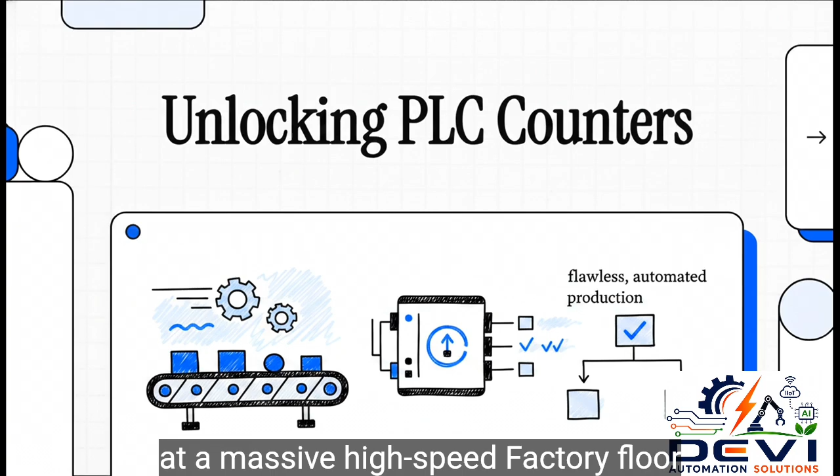I am absolutely thrilled you're joining us today because we're going to explore what is essentially the deterministic heartbeat of modern manufacturing. If you've ever looked at a massive, high-speed factory floor and wondered how they keep track of everything without the whole operation falling apart, you're in the right place. Today, we're taking a deep dive into the technology that powers flawless automated production. We're talking about the PLC counter.

So think about this for a second. How does a factory count 10,000 bottles a minute without making a single mistake? Honestly, imagine trying to do that manually. By the time you've even blinked, a dozen products have already zipped past you on the conveyor belt. The sheer scale and speed of high-speed industrial production is mind-boggling. Human error isn't just a possibility in this kind of scenario, it's practically guaranteed. Yet somehow, these massive automated facilities run 24/7 with absolute, unwavering precision. How do they pull it off?

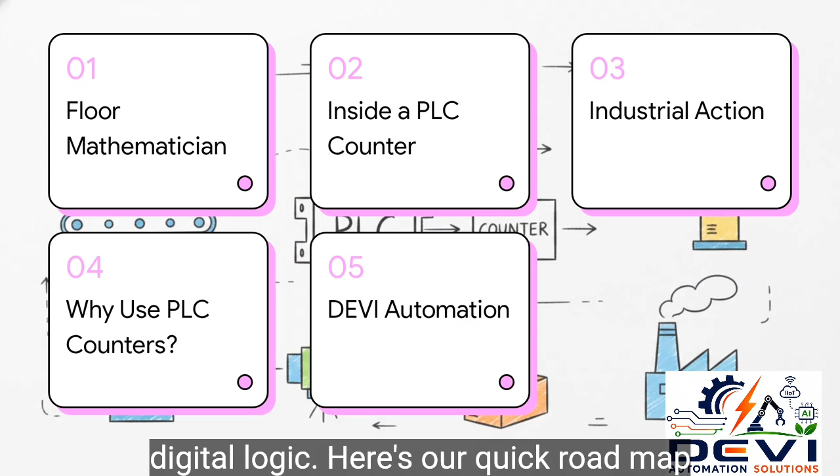Well, the secret lies in a tiny, incredibly powerful piece of digital logic. Here's our quick roadmap for today. Number 1, the factory floor mathematician. Number 2, inside a PLC counter. 3, real-world industrial action. 4, why use PLC counters? And finally, number 5, DEVI Automation Solutions.

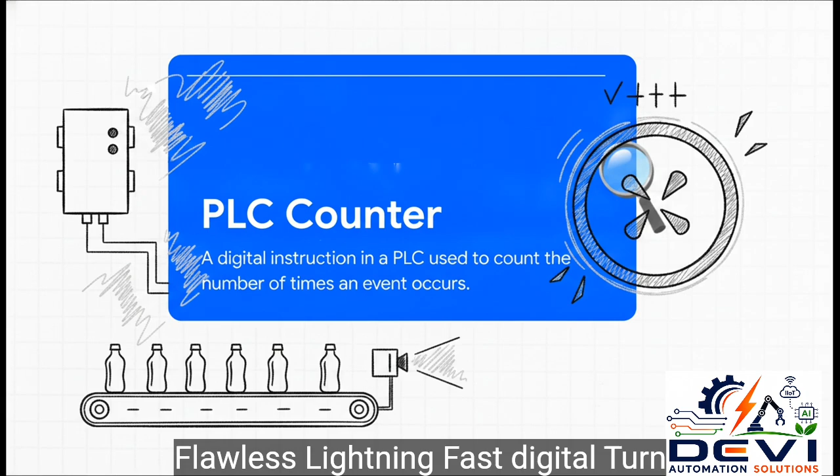Let's jump right in. Section 1, the factory floor mathematician, defining the core concept. At its most basic level, a PLC counter is a specialized digital instruction sitting right inside a programmable logic controller, and its entire job is to count the number of times an event occurs. Within the PLC's continuous scan cycle, the counter acts like a highly focused, absolutely flawless, lightning-fast digital turnstile. Every single time an event happens, say a bottle passing by a sensor, that digital turnstile spins. It strictly tracks every single product, perfectly, every single time. I actually like to call them the invisible mathematicians.

Because if you try to picture the sheer chaos of manual counting, people standing around with clipboards, desperately trying to tally items on a fast-moving belt, getting distracted, losing their count, it's a total nightmare for efficiency. But when you replace that with the elegant, error-free reality of these invisible mathematicians, everything changes. In a high-speed bottling plant, they're sitting quietly in the digital background, doing the math flawlessly, millions of times a day, making sure every single crate has exactly the right number of bottles.

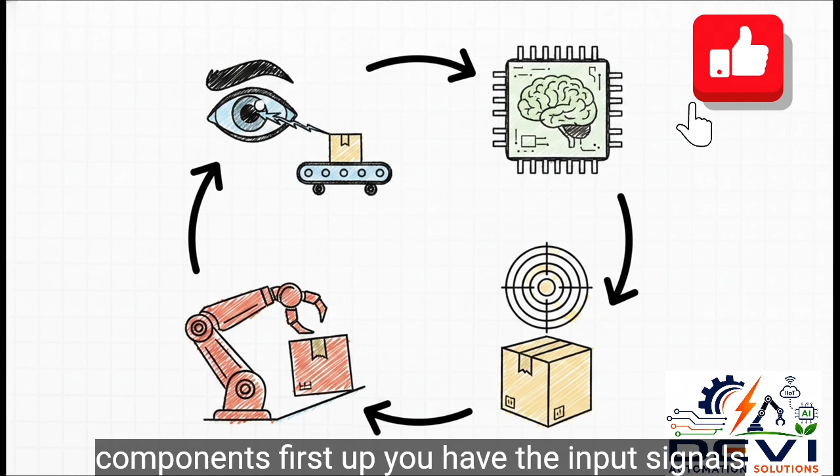Moving on to Section 2, inside a PLC counter, components and principles. So what actually makes this tick? The anatomy of a counter relies on 4 essential components. First, you have the input signals from sensors. Think of this as the eyes of the operation, like a laser or a physical switch that detects an object. Second, you've got the internal counting logic inside the PLC itself, which is the brain processing that signal.

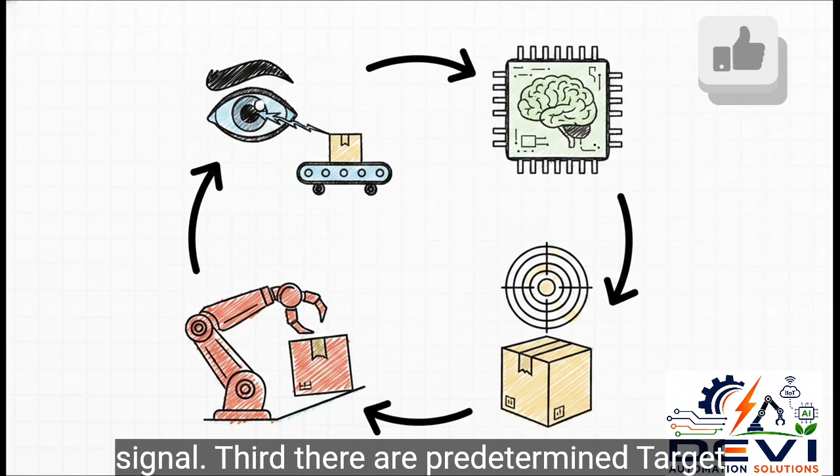Third, there are predetermined target values. This is essentially the magic number the PLC is trying to reach, like 12 bottles for a 12-pack of soda. And finally, you have the output execution triggers. This is the muscle. It's the command the PLC fires off to actually do something once that target number is hit, like physically pushing that 12-pack off the line.

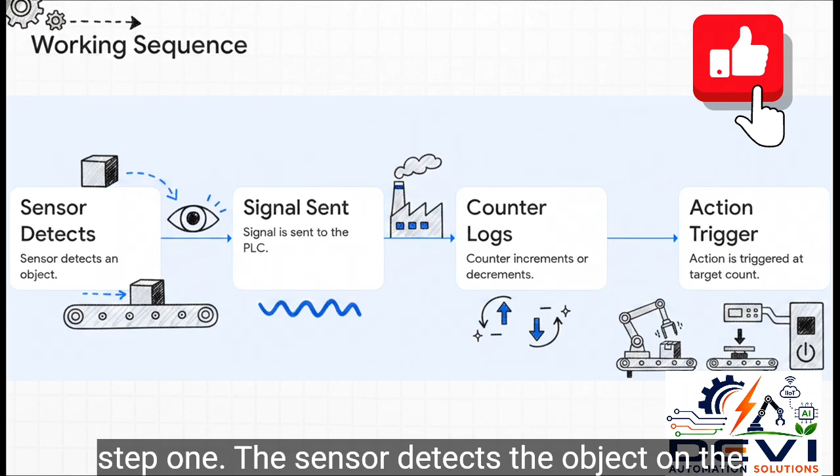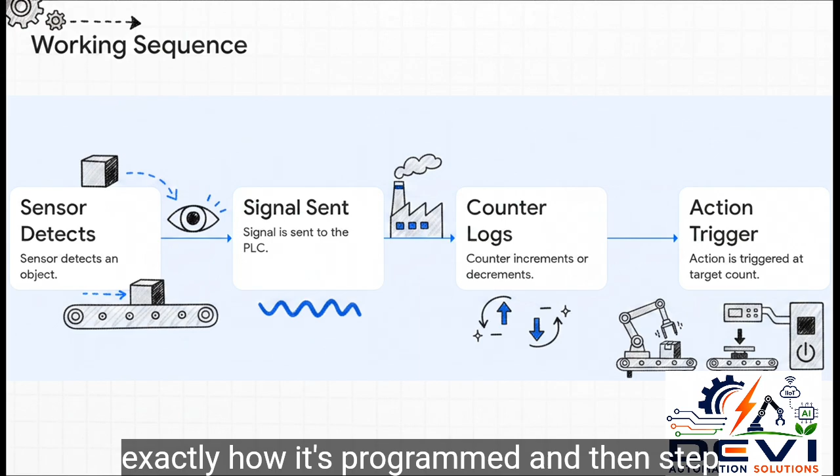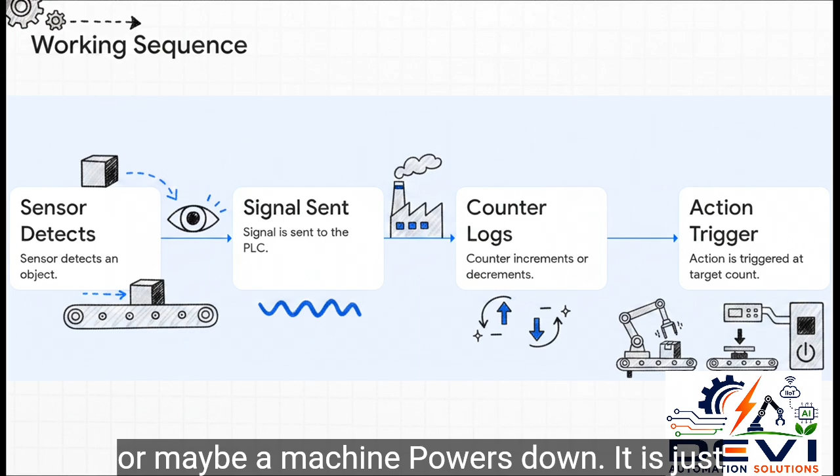And these 4 components build into this deliberate, beautiful logical flow. Step 1, the sensor detects the object on the belt. Step 2, a signal is instantly fired off to the PLC. Step 3, the counter registers that signal and either increments up or decrements down, depending on how it's programmed. Step 4, this is where the magic happens. An action is triggered the very millisecond the target count is reached. A diverter arm sweeps, a box is sealed shut, or a machine powers down. It is a continuous, perfectly timed sequence.

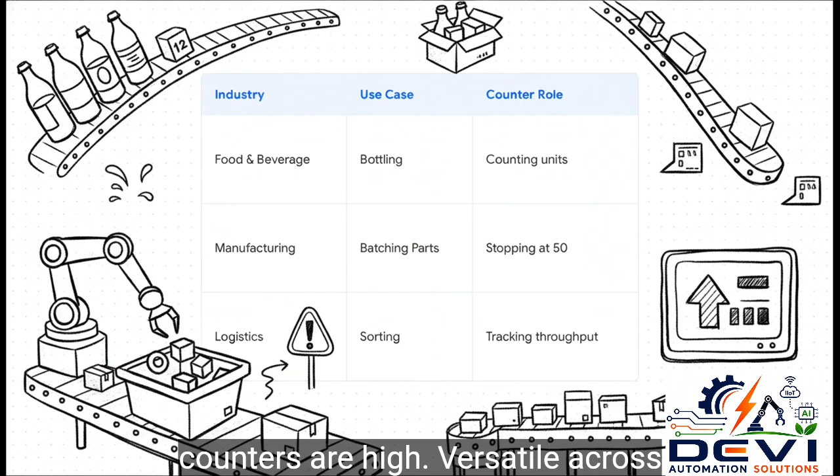Section 3 now, real-world industrial action, from theory to practice. What's incredibly cool is that PLC counters are highly versatile across totally different industries. We're talking about handling frequencies up to hundreds of thousands of times per second. In the food and beverage industry for high-speed bottling, the counter's role is making absolutely sure that exactly 12 units make it into a 12-pack.

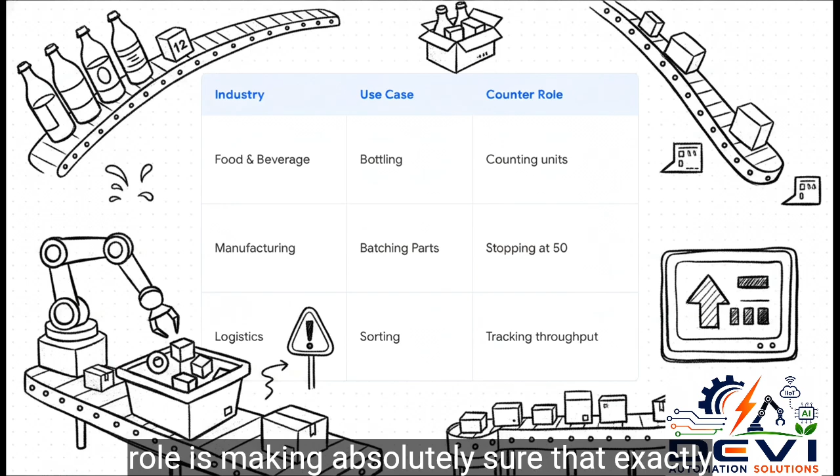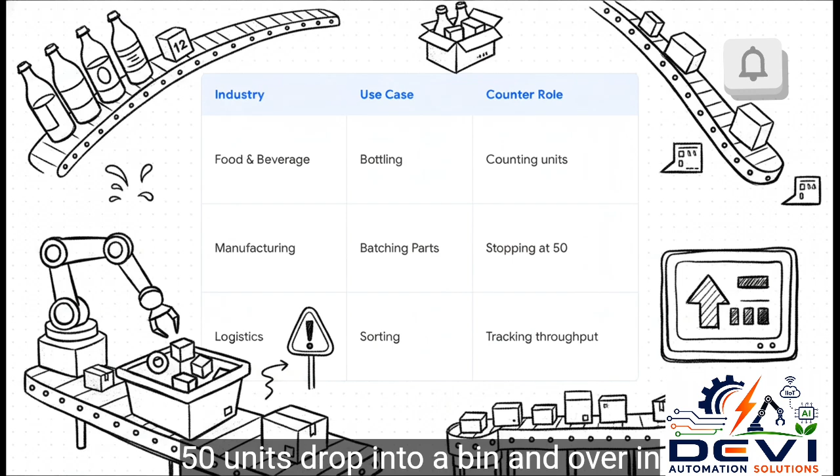No more, no less. Down in manufacturing, we have batching parts. Here, the counter actually stops the conveyor the exact moment 50 units drop into a bin. And over in logistics, when you're dealing with millions of packages, the counter is tracking the daily throughput on a sorting line so warehouse managers have perfect, real-time data on their productivity.

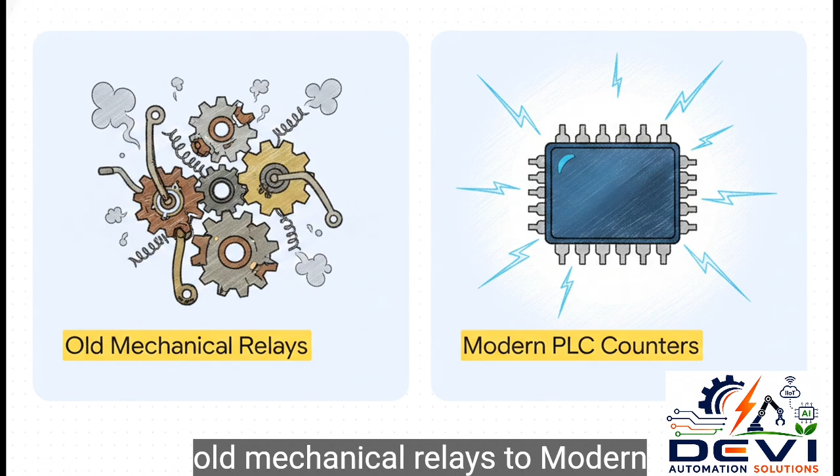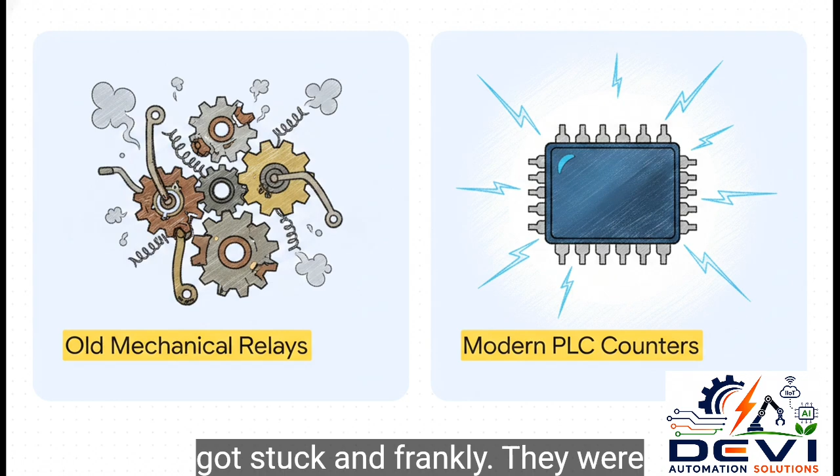Section 4, why use PLC counters? The big win. If you compare old mechanical relays to modern PLC counters, it reveals this massive leap in efficiency. Back in the old days, factories had to use physical, clunky mechanical relays to keep count. They had moving parts, which meant they wore out, they got stuck, and frankly, they were slow. Modern PLC counters have absolutely zero moving parts.

Because it's purely digital logic, you get a massive leap in speed. We are literally talking microsecond reaction times here. You get perfect, unwavering accuracy, and overall efficiency skyrockets because you're drastically reducing maintenance downtime and completely eliminating human counting labor. It is for sure a total game changer.